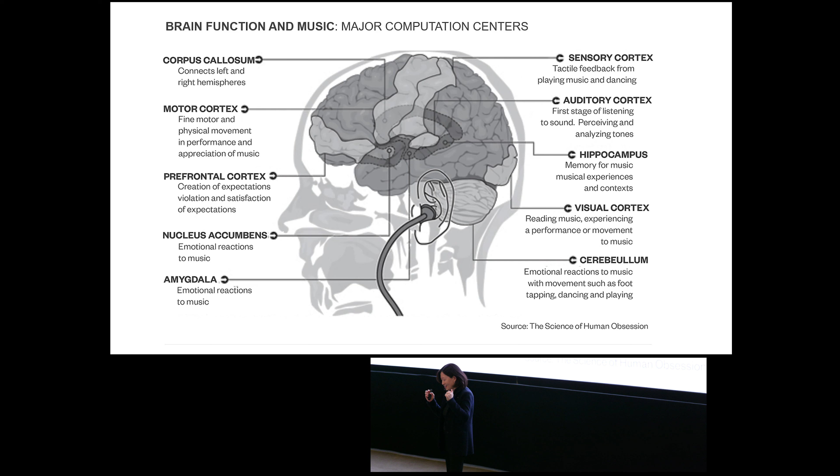But the thing about landscape is it's multisensory. You can close your eyes and still experience the landscape, much like how you do that in music. And sound is this amazing thing - it's basically just molecules bumping against each other until it goes into your cochlea and into your brain.

When you play music, this is the part of the brain you're trying to get to - the amygdala. It's the thing that, when you listen to your favorite piece of music, for me it's Bill Evans, brings tears to your eyes or makes you re-see something. Your amygdala is what changes that sound in your brain and makes it emotional.

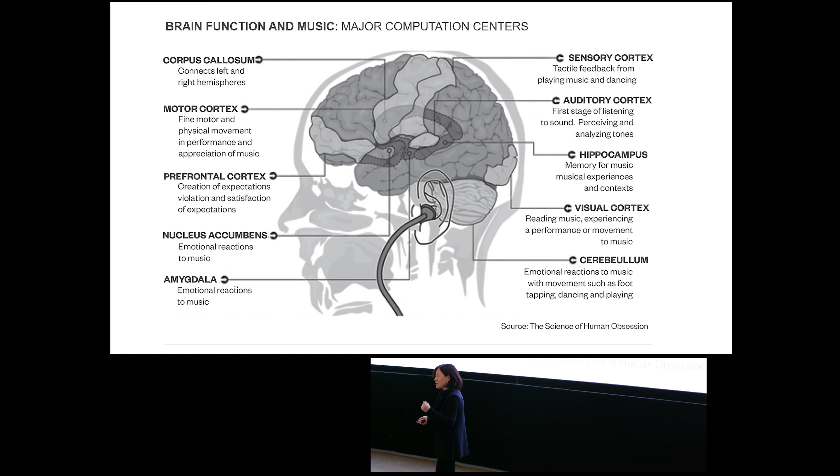So in our work, we're also trying to reach the amygdala. We're not just trying to make something that's healthful, that's resilient, but we also want to bring a sense of wonder to the place. I wanted to talk about all three things today.

So about 18 years ago, we did our first healing garden in a hospital. Since then, we've done 14 healing gardens. We're working on New York Presbyterian with Studio Gang right now. It is some of the most rewarding work that I do, that our team does, and it is utilizing the materials of landscape to really bring about change.

There's a lot of psychological research out there which now shows that within 3 to 5 minutes of putting landscape within a hospital, there's a whole set of normalizations that happen to the bodily functions, to the brain function, to blood pressure. So every hospital that we work on now talks about bringing 4 or 5 gardens, which is a sea change from many years ago.

We are all grateful that we're able to join here together in person. From 2020 to 2022, the Pew Research Center has done a continual public health analysis, and what they found is there's been a spike in what they call high intensity psychological stress. More than half of young adults today, between 18 and 29, have experienced at least once a year over the last 2 years what they call high intensity psychological stress. We're bordering on a moment where we're saying this is a mental health crisis.

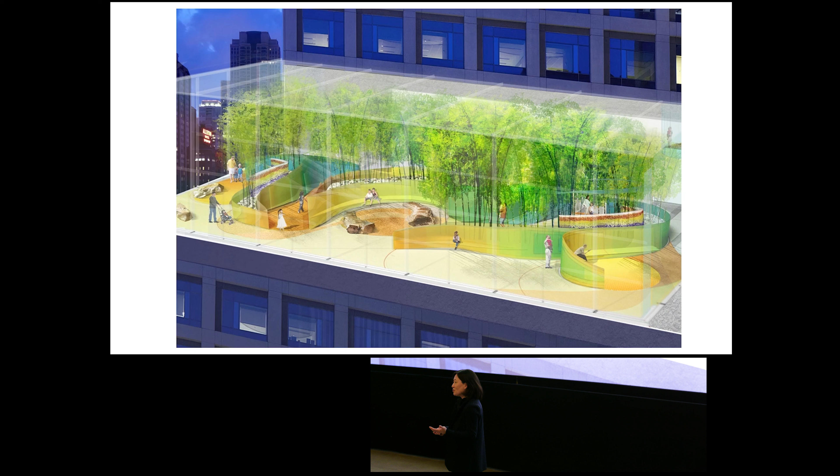It was right at the beginning when we would have these debates, or the client would have debates: should we be spending $25 million on a garden within the hospital, because this is a vertical hospital, or could we buy 3 MRI machines and place that in this space instead? Because that research had come out, we started to say, well, I think we should put a garden in. It was a long, like 6 months of conversations.

Whenever we do these projects, we do sketches. We work by hand, but we also work three-dimensionally. This project was all inside, so there were all these parameters about working inside, and we wanted to keep everyone safe, all the patients.

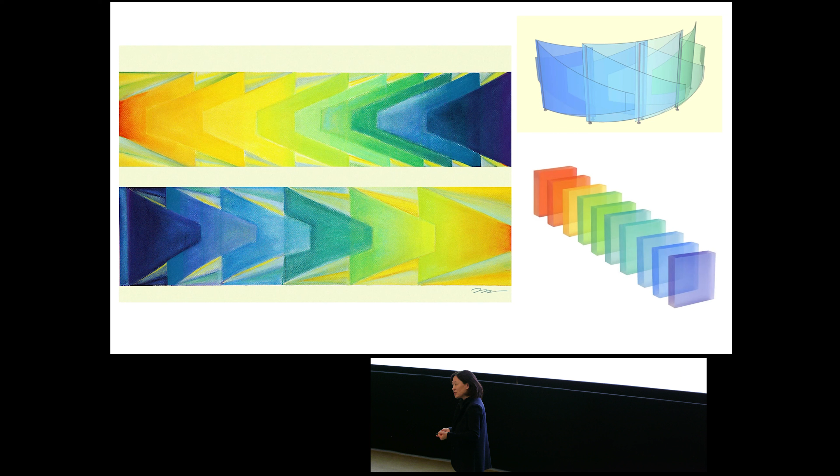So there were very strict parameters of what kind of materials we could use and the kind of abstraction. This is a resin material that is nested, custom-built, a series of these kind of layered resin materials. And you can see in the background there is this glycerin fountain that you probably have seen in hospitals.

What we did was we filled them with marbles with the kids. And when the glycerin comes up, it actually creates the sound of the seashore that we have in Massachusetts, in the North Shore, like these small pebbles moving back and forth.

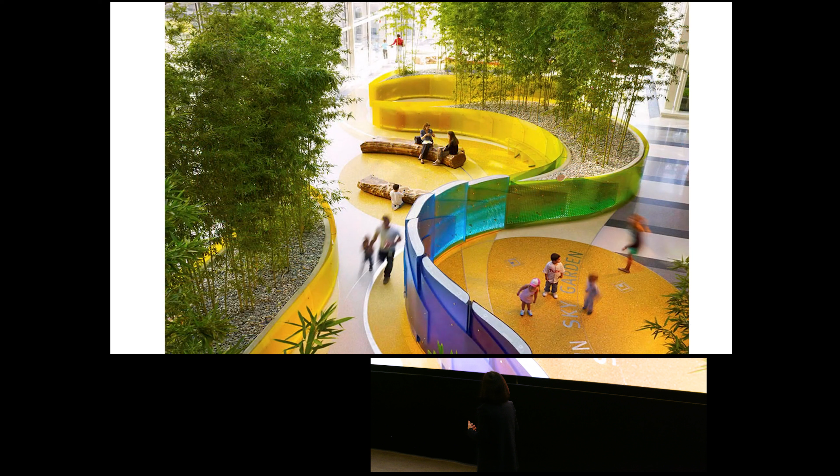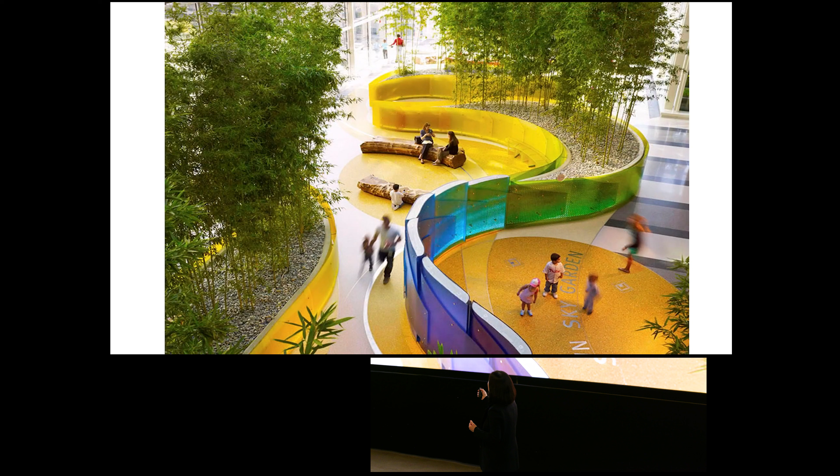So the work is really about creating a series of these garden nooks within this larger area. And then embedded within these walls are a series of different kinds of interactive light play elements for the patients and their families. Let me just go back — there's probably 12 of these logs.

I wanted to take a moment to talk about this project, because for us we're always looking for a kind of cultural resonance in the project itself that emerges out of the city we're working with. This is in Chicago, and we had finished construction documents at this point. Then we got a call from the urban forester we were working with, who said there was a storm the night before and 3 trees planted by Frederick Law Olmsted during the Columbian Exposition had just fallen.

What they did was they sliced these into 3-inch slabs and kiln dried them over 2 years. And we thought, wouldn't it be great if kids could — we could cast kids' hands and embed them in the wood, so these become elements that other kids put their hands on. Then it's an interactive element.

So we set aside 2 days in Chicago in their old hospital to say, do you want your kids' hands in the new garden? We expected maybe 20 kids or so. When I got there in the morning, there was a line out the door. And these kids were watching SpongeBob SquarePants.

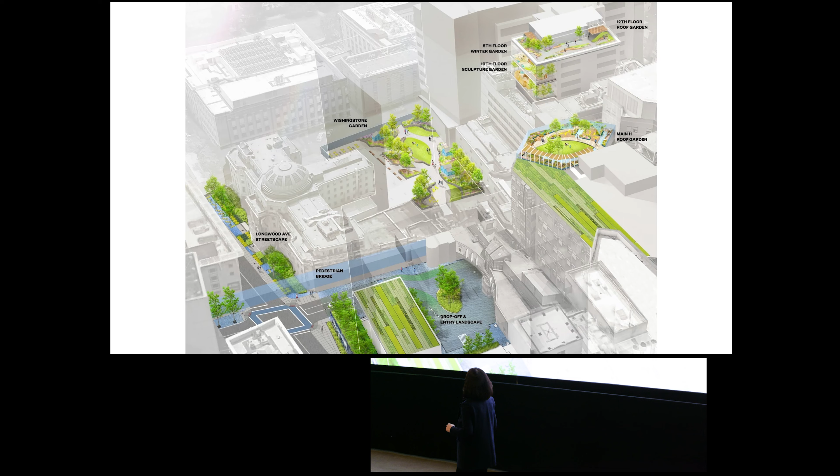This is the entry wall. It goes about 400 feet, and there's a series of 8 different gardens. Each one serves a different purpose and a different constituency.

This is a paradigm shifting project because each garden serves different kinds of patients. It provides play areas for siblings. We call this the root garden.

Okay, so those are the healing gardens. I wanted to go to the other end of the spectrum to show how those healing gardens and the idea of wellness have entered into all of the work we've done that has bigger urban impact. So this is downtown Seoul.

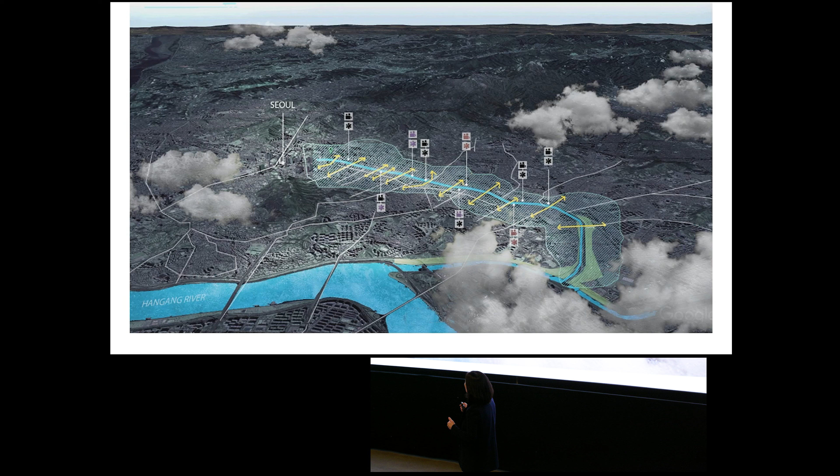This is the Cheonggye River as it feeds into the Han River. Part of the project was not just bringing that historic river back, but reconnecting the city. All these yellow cross lines are historic bridges that were put back into place.

For hundreds of years, urban effluence was flowing directly into this river, and during the Korean War it became really contaminated. So what they did was cover it with a highway - this was 7 miles of highway. This is the process of it transforming from a highway back to that historic river.

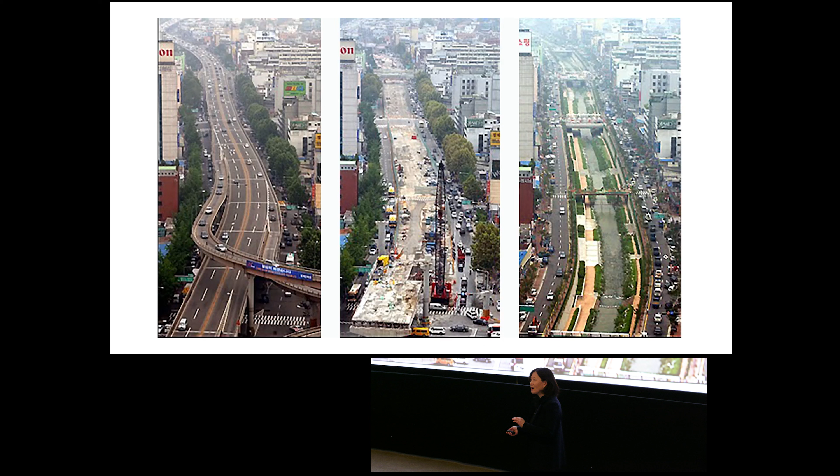I think this is a video that gives you a sense of the scale. We realigned the highway and also created this greenway all the way for 7 miles through the city.

And it really transformed the city. Imagine this was a highway, both at grade and elevated, and it was a kind of realignment of the roadways, as well as uncovering this piece of history. It is the reason why the generals who came to Seoul decided to place Seoul where it was - because of this natural amenity.

There's a lot of bragging rights for this project, and every year it gets outdated, so I think these numbers are outdated, but it addresses the urban heat island effect. It introduces about 250 new species of aquatic life and really reduces air pollution.

Anyone who's been to Hong Kong, Seoul, Tokyo knows that's a big issue there, and it really restored the water quality of the stream back to a class 2 level. But nobody really cares, right?

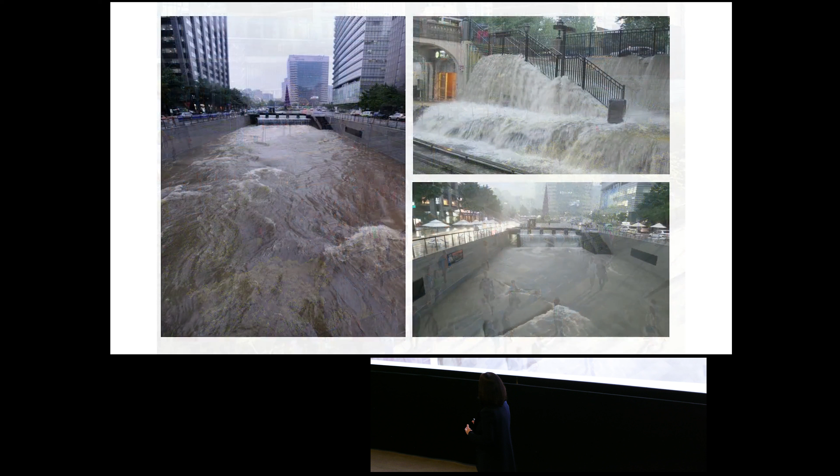You can see that the river is 3 to 5 meters below the street level, and the reason why is because of this. So this is one kind of resiliency. I'm going to show you a couple different ways we do urban resiliency, but this is one where, just look at the stair.

And this is flash flooding. So this all happens within a matter of 3 to 6 hours. It's very dangerous. On an average day, the Cheonggye River takes in 285,000 tons of superficial runoff every day. But during a monsoon, it's like a bathtub, it just fills up. I think I have a picture afterwards. Oh, I have a video.

So it's not just a place of resiliency, but it is a place of cultural celebration. They use the river during the holidays, for special events. And what I consider a successful project is one where I can go on Instagram and I don't need to hire a photographer. So these are 2 kids boogie boarding, which I love. I think it's awesome. It becomes an urban beach.

Their summers are like Dallas, quite hot and muggy. And this is, you may have read this in the paper, the Sewol drownings. I've forgotten how many school children were on this boat, and they were on a class trip, and they drowned. It was a huge national tragedy because it was children.

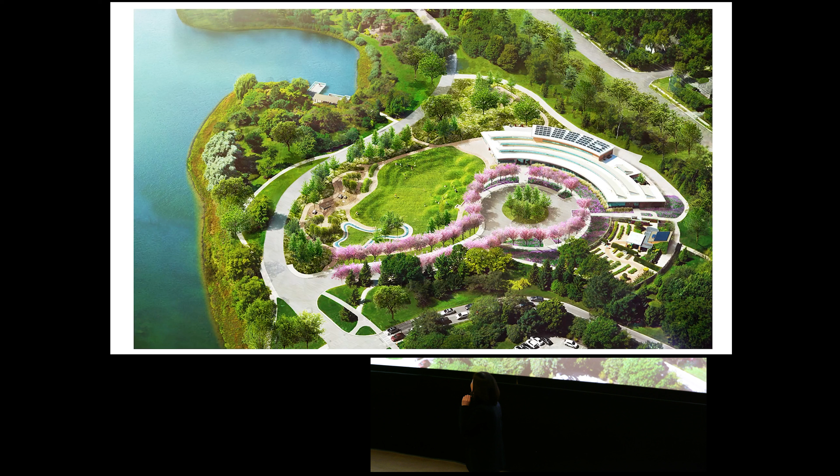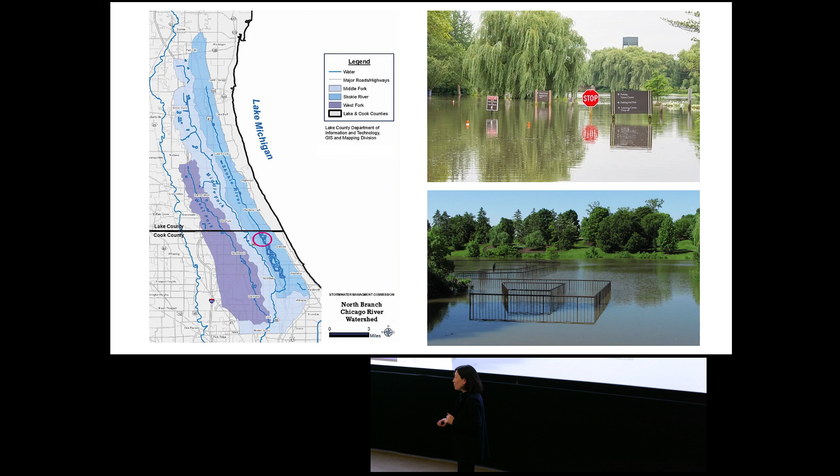This is in Chicago, a different kind of resiliency, at the Chicago Botanic Garden. It's right along the Skokie River, and they experience a lot of flash flooding. Our garden is located here, and we designed this. You can see that this whole area is flooded, and again, within 3 to 4 hours, it just inundates the garden and then slowly gets released.

Ideally, slowly gets released. So this is that space that was flooded in the previous photo. It was an act of trying to manage balance, cut, and fill to save money in the budget. We created these sculptural landforms that also act as a kind of detention basin, and they are also places for play.

We also took the logs that were on site and created these nature play structures. It's a whole other lecture, but I think the idea of buying playground equipment from a catalog is criminal.

We laugh, but I think it's absolutely true. The brain grows till you're about age 29 - that's depressing, right, for all of us over 29? But there is so much learning that happens on the playground. And when we take that away and create these kind of closed circuits...

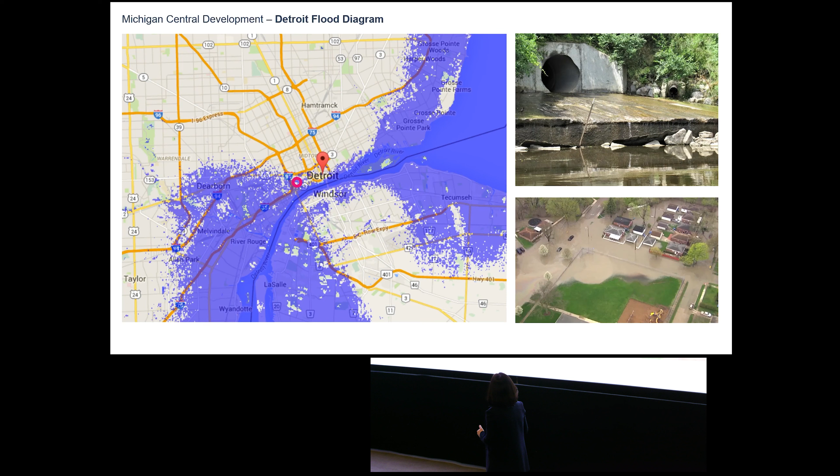We're interested in creating a project that has a lot of bragging rights. It's completely self-sustaining, utilizes clean energy like solar and wind turbines to fuel the entire project. It's got over 600 trees with 800 diverse plant material. It daylights about 35,000 square feet of stormwater and does things with technology.

This is supposed to be a technological center. When we first started the project, we thought maybe this is a place where there'll be drones flying everywhere, like the Jetsons. What we found is that as technology advances, it's becoming smaller and smaller, and it's actually allowing us to get closer to the natural world in this project.

The lighting is responsive. Most lighting in parks and in the public realm is an on-off switch. There's technology out there today that allows it to be responsive when people are coming into the space—it kind of rises up.

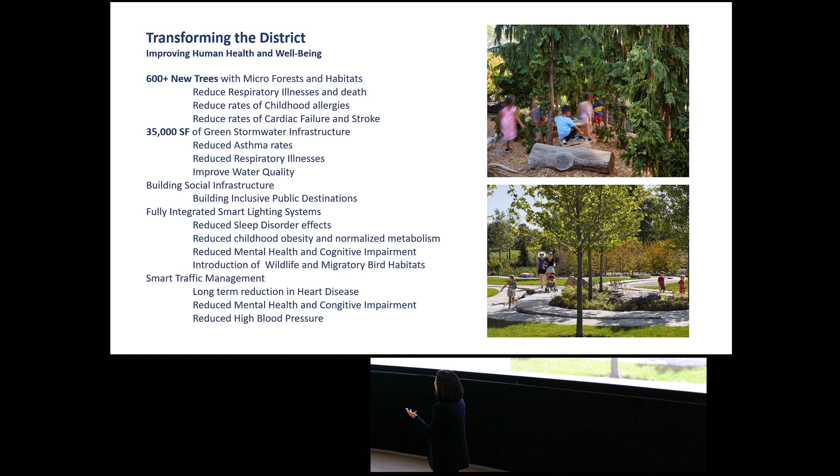There's also smart traffic that reduces things. So all of these measures have an interface with wellness—asthma rates, obesity rates, sleep disorder, blood pressure. All of these measures we're taking in the design itself also help us with health and wellness.

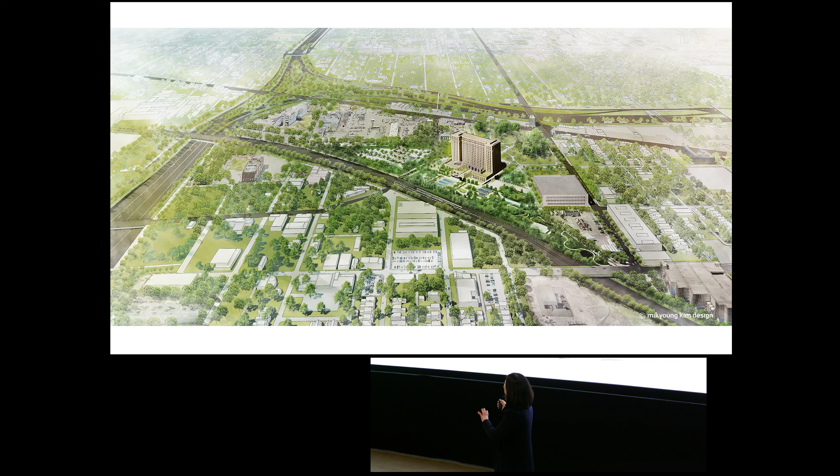So this is the project. Here we're looking at it from the other side. Roosevelt Park is over here. Every time I show this project, people say, wait a second, is this the front door? Everyone always thinks of that as the front door, but we're trying to flip it and make the south side the front door.

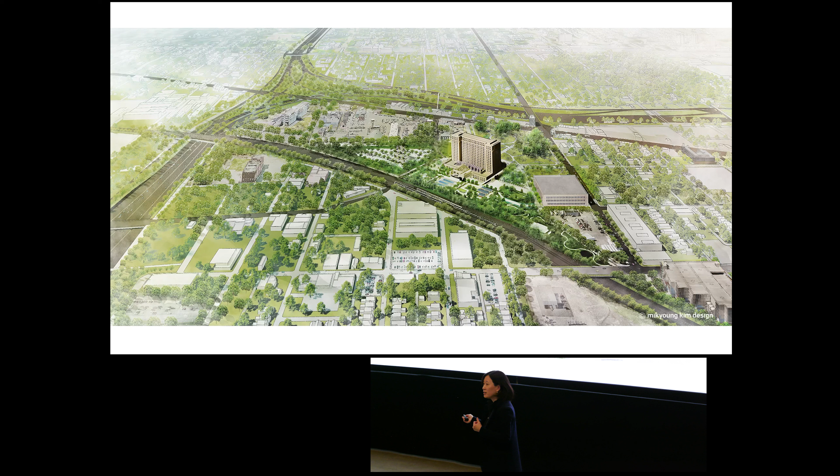So this is the park located here. This is the Albert Kahn building that's open now—it's a tech center where there's a lot of innovative young folks developing the design. As we zoom in, you'll see this kind of lineage of the tracks that the whole design is inspired by.

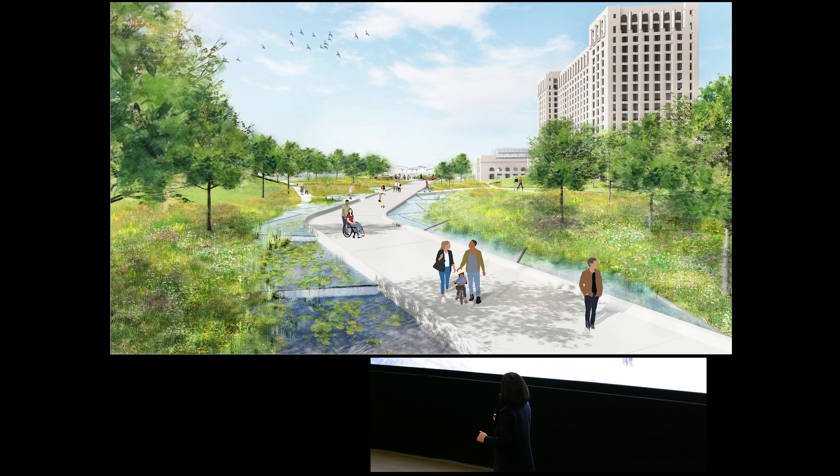So let me go back. This is the gateway to the project, and we're daylighting all of the stormwater there. This is the front entry with the daylighted stormwater elements within it. And you walk across the water to get to the train station itself.

The material resonance in this project is the history of the project itself. Two years ago, we spent a week there, basically like junkyard collectors—like, don't throw that away. So there's all this stuff that we saved, plus the tracks, plus the columns, the top of these colonnades that were slowly eroding and rotting out, which they were rebuilding. And those are going to be part of the project.

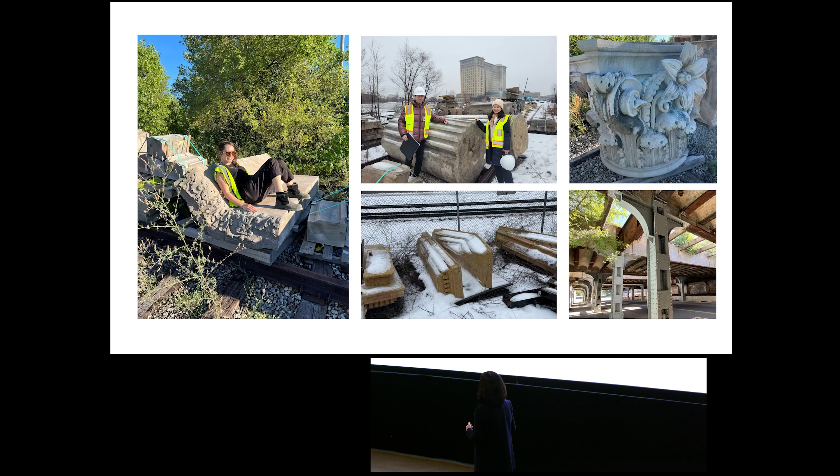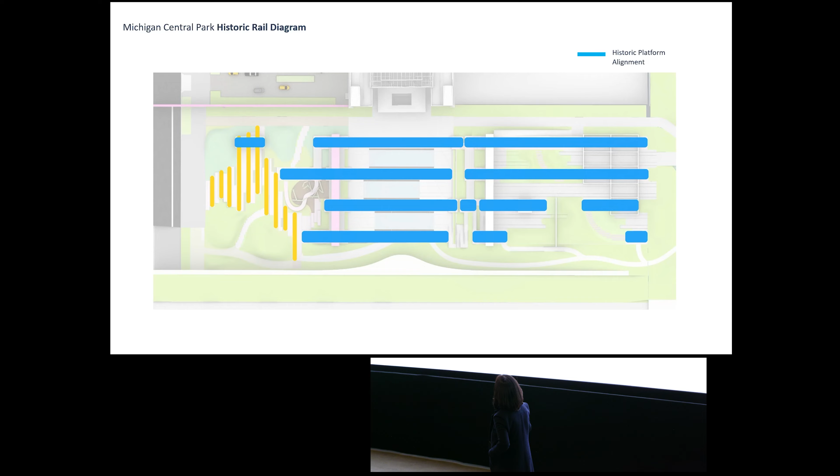These are those lines in plan. So the South Station is here, those are the historic rail locations that guide the whole project. And so you can see, this is the central plaza, the center of the project.

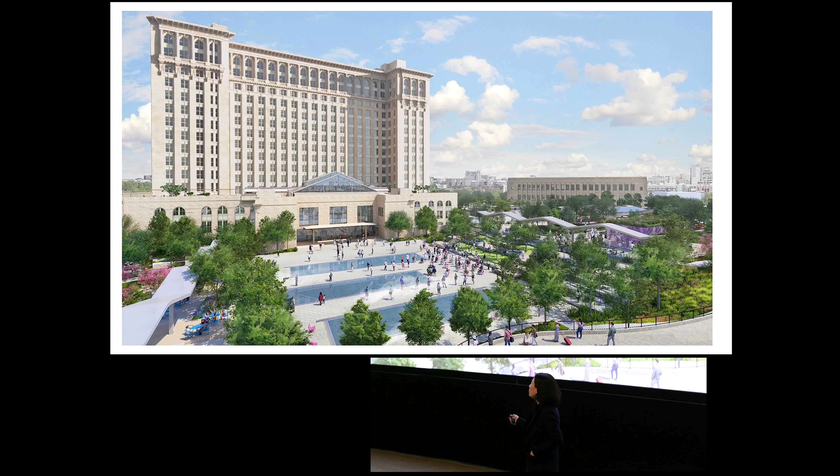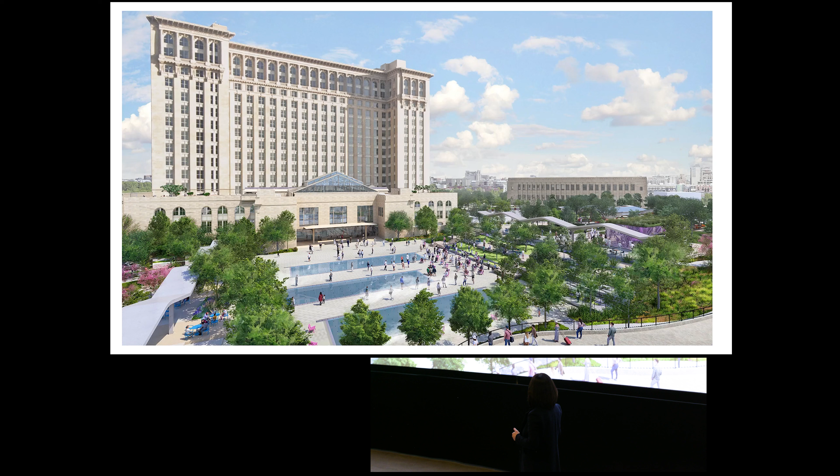You can see there are these fountains that align with those guidelines I just showed you, and it's a performance space, that central space.

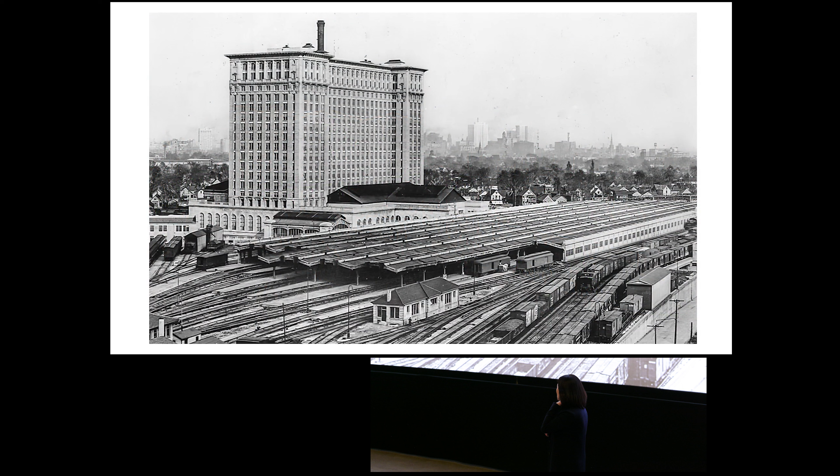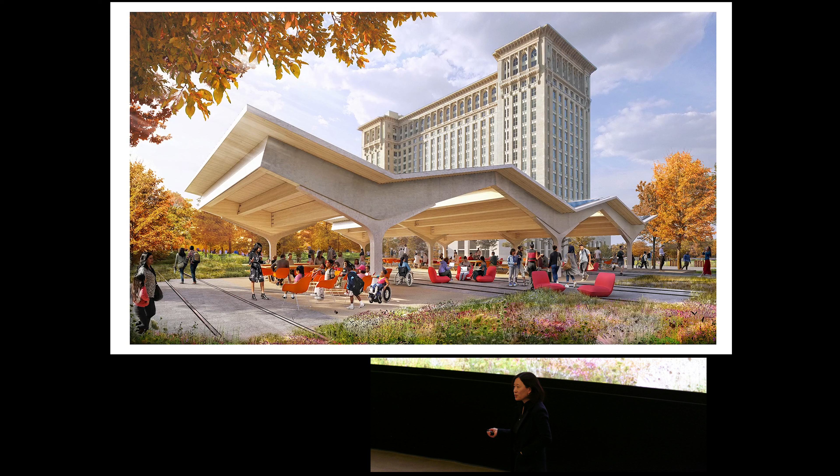Inspired by a lot of the history, here is the train station, and then there are these canopy structures that are very heavy. This is where all the trains stopped underneath. So we've started developing these glulam structures that actually use the same geometry. It works quite nicely because the columns come down, inspired by but not a replica of, right at the grid line of the historic structure itself.

One thing that differentiates us from other landscape architects is that we're situated at the overlap between architecture and landscape. We think it's important for architects to design landscape, and for us to design the architecture. So we've been working closely with our team to develop this structure.

This is covered with solar panels at the top, and all the solar panels bring energy down to the bottom, so that from the Boys and Girls Club which has tech classes, to folks in the Book Depository building, the Albert Kahn building, we're hoping they'll come out here and actually work, collaborate, and engage each other.

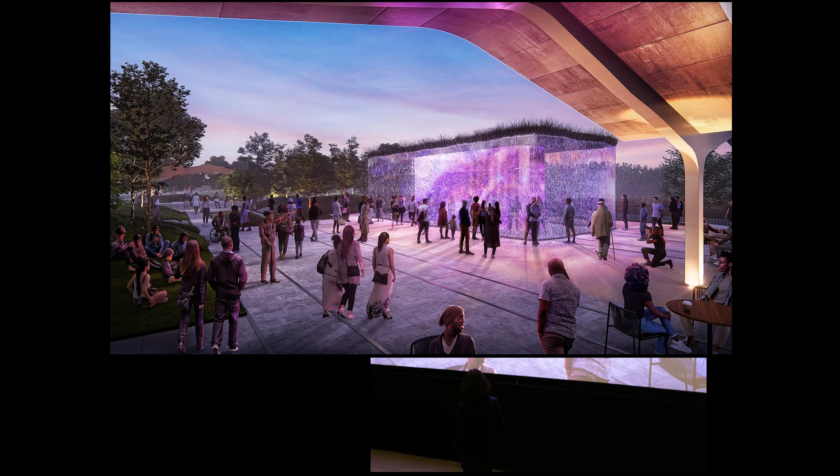In this tech plaza, we also have another typology of exterior art and technology opportunities. This is a media cube we are designing, where artists will come in monthly, quarterly, and integrate their own vision within this kind of media box. We think this is going to be a real destination for this project.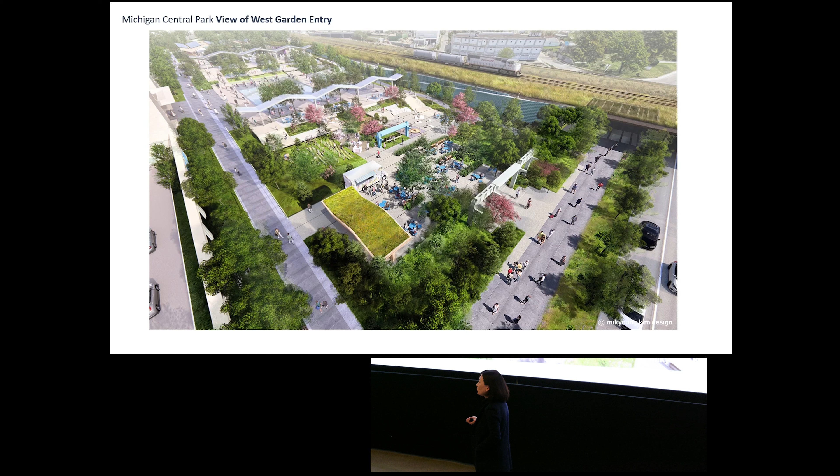On the other side of the project, we have a series of gardens with playground areas. I'll show you one of the playground areas, this one. You can see we're reusing the columns and a lot of the relics of stone to create these play structures.

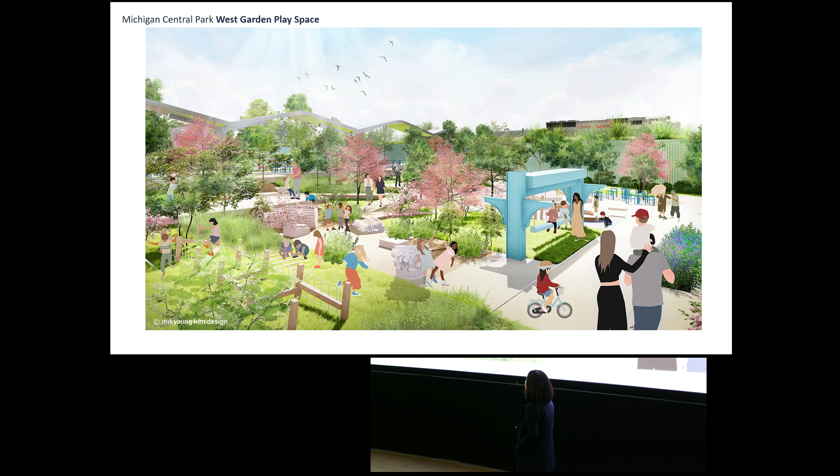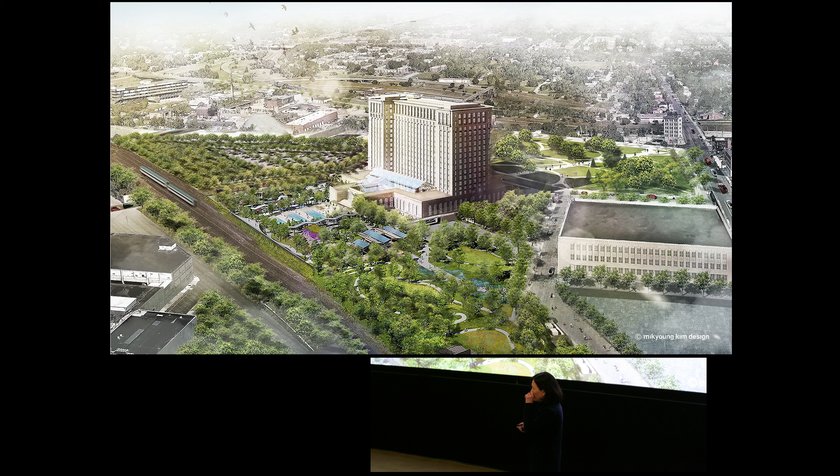This is the resiliency gateway. These are those plug-and-play canopy, the glulam structure. This is the location of that media cube. That central plaza is located here, and then the gardens are located here. It's all tied together with that linearity of the tracks themselves.

Second to last project. This is in Houston, the TMC Helix Park. We just finished this last fall.

Flash floods are the problem in Houston. It shows up on the front page of the Boston Globe many times, so you know it's serious. You can see the severe flash flooding since 2015, almost every year there have been these major storm events.

In some ways it's coming full circle back to the Soul River project, in that we wanted to create a resiliency project, but it's also located within the Texas Medical Center, which is the largest medical complex in the country, some people say across the globe.

Part of the project was to lift up the site about 8 feet and create what we're calling this kind of 5-foot sponge. It holds about 3.2 million gallons of stormwater within it and slowly releases it. It's a rare condition of a win-win within this sponge, which in section looks something like this.

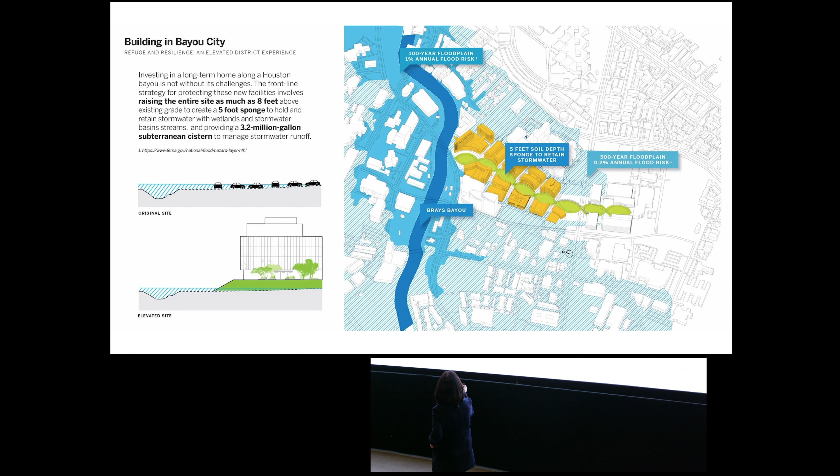Our site is located here, and we've built 14 acres here. It is a public park given back to the community.

You can see it's got a lot of stuff going on in it. There's a lot of mobility, a lot of energy harvesting. Daylighting stormwater was a big piece of the project.

So that's what I want to focus on today: how do you take something that's kind of a natural disaster, store it somewhere, and then transform it and daylight it, making it something wonderful? That's kind of what all these projects try to do in different ways.

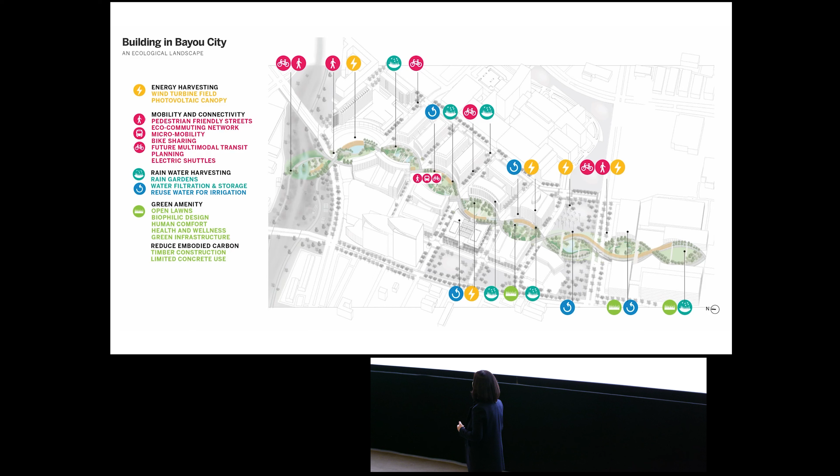Whenever we're working on these complex projects, we think about plant material not just as individual trees, but the ecoregions we can integrate. Because we had a series of parks interlinked with each other, we were able to integrate 4 different typologies of ecoregions native to this area. There are 650 new trees here.

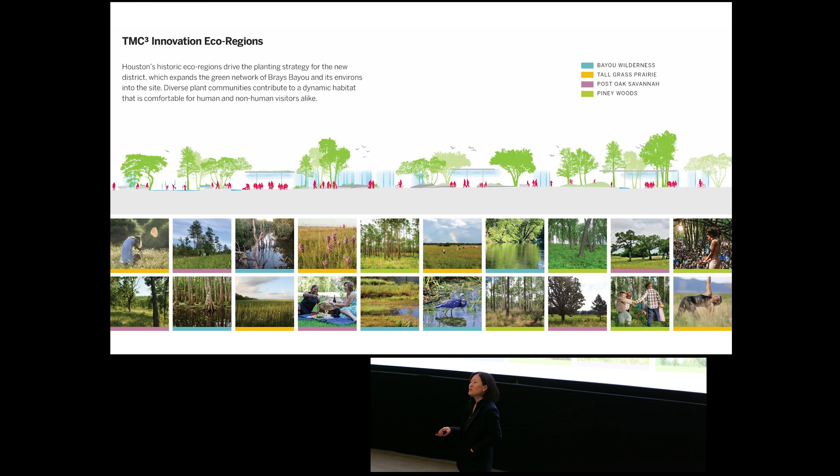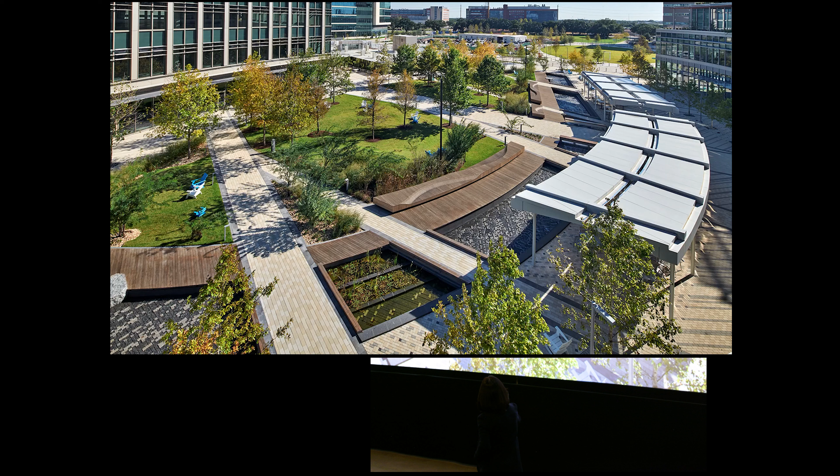And so this is the piney woods. You can see there's this stream located here that turns into kind of a natural freshwater detention basin. And this is the park. You can see here, it's very hot in Houston, as you know. I don't have to explain to you guys.

And last year when we were planting in the fall, in September, it was like 110 degrees 7 days in a row, and they didn't get rainfall for like 80 days or something. It was crazy. So this is basically upcycled stormwater that's detained, then cleansed, then daylighted.

And so this is a detail of the basin of that stormwater. This is how you create that agitation of water - it's 3 different colors of granite stacked at different heights to create that agitation.

And so that canopy structure - when I said it's hot in Houston, it's like, no duh - the underside of it is reflective. So this is underneath that canopy. And I love doing projects where they're hard to explain but easy to understand when you go to it.

So you'll all have to go to Houston. Did you just hear me? I just took on a southern dialect. Y'all.

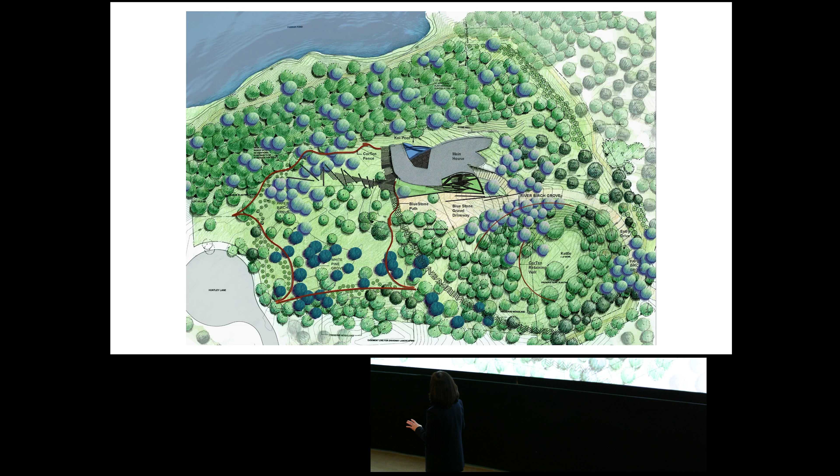And this is this kind of enclosure that we designed along with the entire landscape. Everything is pervious on site, even their front entry point. And they had 2 German shepherds, so this dimension here to here is the width of the shoulder-to-shoulder dimension of their German shepherd. Let's go.

So it's interesting being a landscape architect - you do lots of different things. Like I come here one day, the next day I'm measuring the dog shoulder to shoulder.

But you can see that the fence itself has a kind of depth to it. It's all solid Corten, 1, 2, 3, 4. And this is my homage to Bach - it's another lecture, but I won't talk about it today.

And this is their lawn - it's steppables with these kind of reinforcement. And then this is from their kitchen in winter.